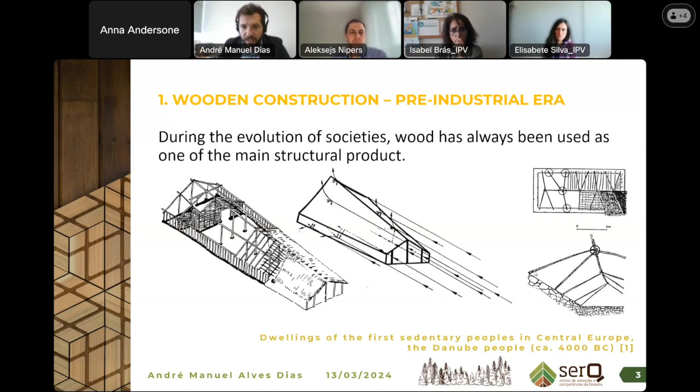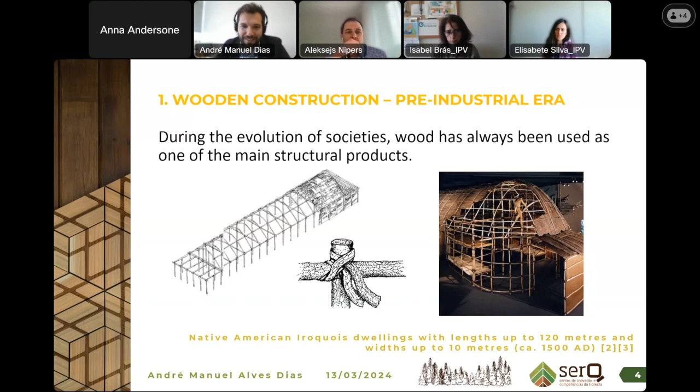The first one was found to have been built in 4000 before Christ, and it was made by Danube people. The next one was built by Native American people. Here you can see a structure 120 meters long and 10 meters wide, which is not a simple engineered system. It was quite complex. And also in China, we have bridges and towers made of wood. Here we have a bridge 42 meters long and 5 meters high.

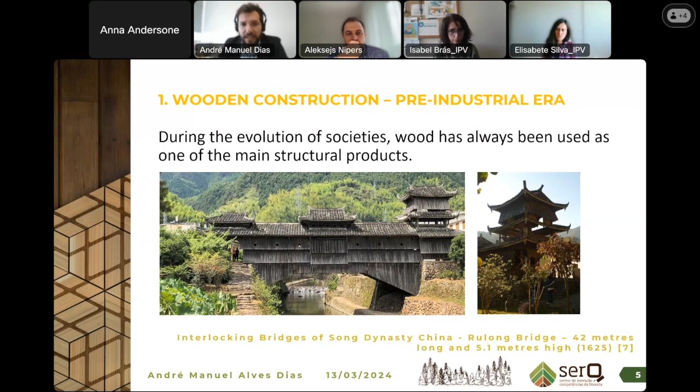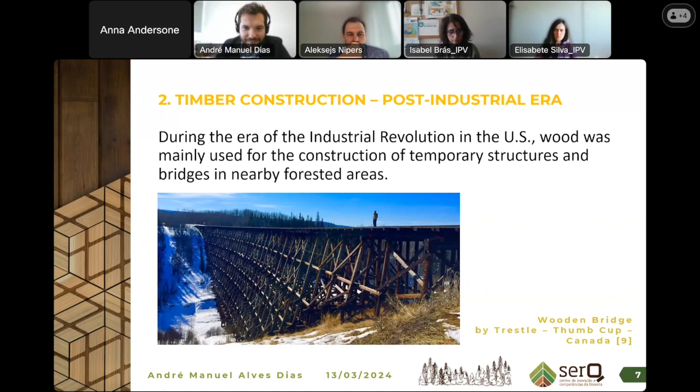All of these examples were from the pre-industrial era, but in the industrial era, with the development and commercialization of other materials such as concrete, bricks, steel, aluminum, plastics, etc., wood usage started to decrease until the 20th century, when glulam was invented, and after that panels and mass timber systems. Since the development of concrete, brick, and steel, wood was mainly used to support those industries. For example, in America, wooden bridges were used to support the extraction of steel and concrete.

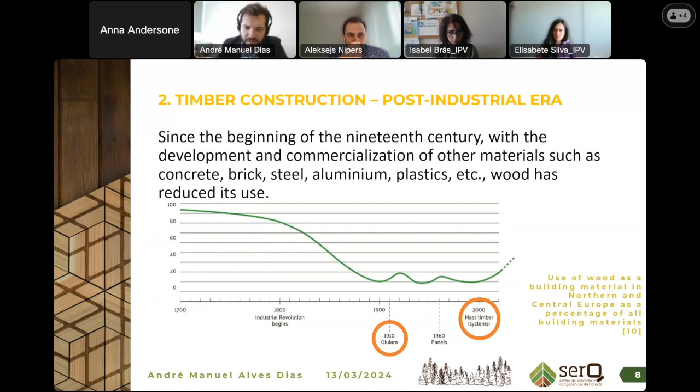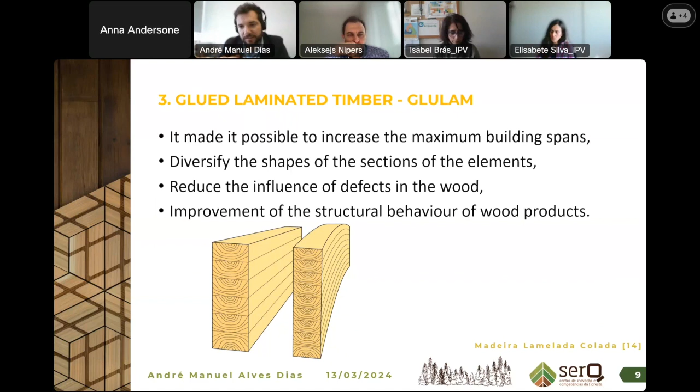But here I will show you some examples of glulam and CLT, mass timber systems, for you to know what these products are. Glulam consists of gluing sawn wood boards. When it was invented, it made it possible to increase the maximum building spans and the diversity of shapes of the beams, because we are no longer limited to the dimensions of the tree, and we can glue more boards to increase the span and the length. We also can reduce the defects in wood and improve the structural behavior of wood products.

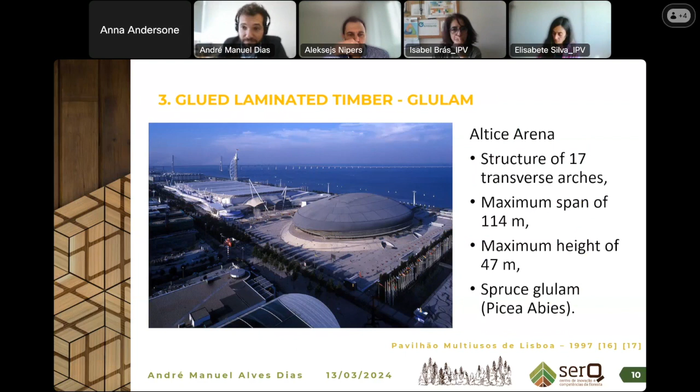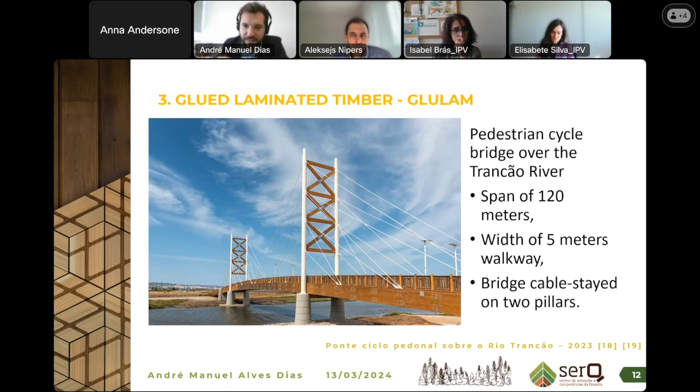The other material that I'd like to present is cross-laminated timber, which consists of gluing sawn wood boards in a transverse way. We have boards in one direction, and in the other layer the boards are glued in the other direction. So it made it possible to obtain panels with greater dimensional stability, and we have a structural material with the behavior of a shell, so it is possible to use it as walls, floors, and roofs. We can also increase the level of prefabrication and the thermal comfort and energy efficiency of buildings.

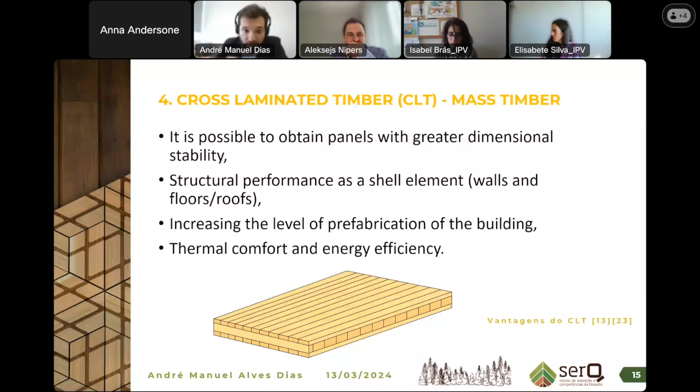So here you have one example of a building made of CLT. It was a system that combined CLT with glulam and with concrete, and this is the first high-rise timber construction. I think most of us may have heard of this building; it has 18 stories. So it was a good innovative building for timber construction, and it's a good example. Here you have an example of a CLT-based building.

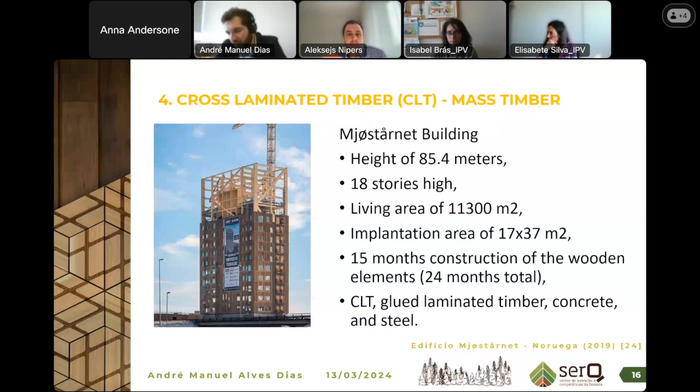Now, after the presentation, I will give you some advantages, disadvantages and challenges that from my experience I can identify in wood construction and the wood transforming industry. I will start with advantages.

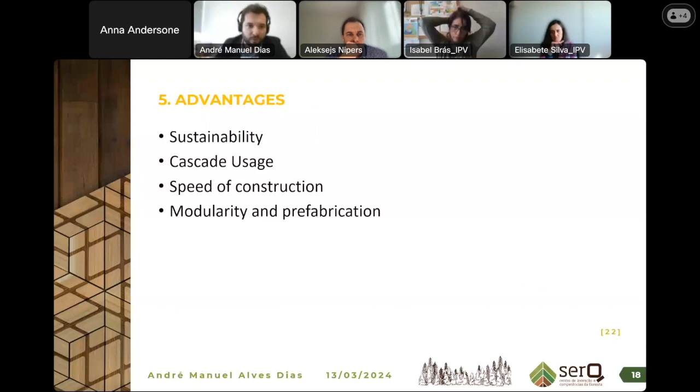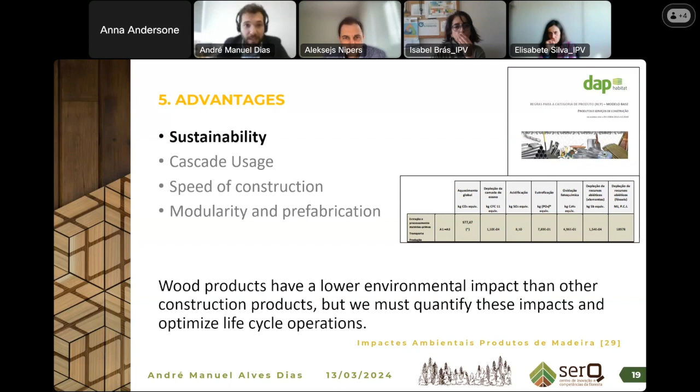The main advantage I identify is sustainability. During the growth of trees, the trees have the power to capture carbon dioxide and keep it in the wood. So when we use wood products, we are also using carbon dioxide that is sequestered inside the wood. This is a good advantage when we compare wood with concrete and with steel, because we have a low carbon footprint.

The next one is cascade usage. This means that at the end of life of wood products, we can have another use for these products. For example, at the end of life of a sawn wood board as a structural product, we can mill this wood and use it as a raw material for panel production, and so on. And at the end of life, we can at least use wood to produce energy. So this is a good advantage of wood, and we can increase the life cycle of wood products.

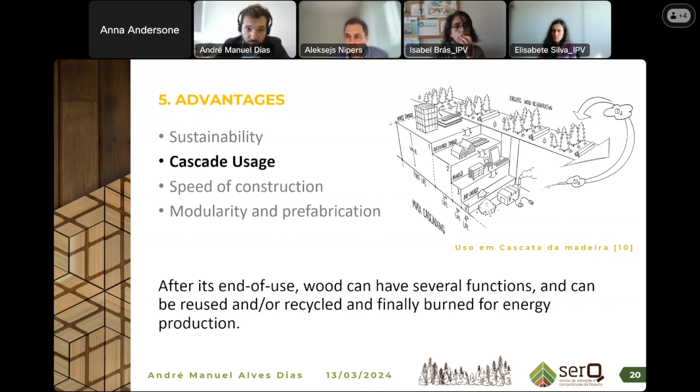And the last two I will talk about in just one slide: the speed of construction and the modularity with prefabrication. Nowadays we are facing problems with a lack of human resources for construction, and we need to increase the prefabrication of our buildings, and wood allows that prefabrication. And we can also reduce the time for construction.

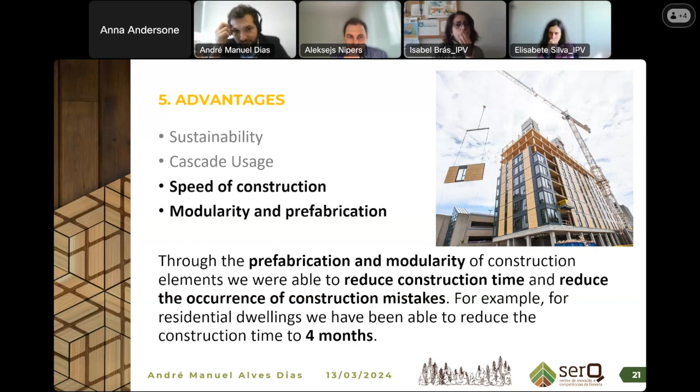For example, we work here in serQ with companies that, from the time they build on the land until they give the owner the keys of the house, take four months to build the whole house. So it's a very good time.

Now I will talk to you about some disadvantages. I don't like to call them disadvantages; they're more challenges that we are trying to face and improve. The first one is the lack of material, and the sustainability of wood and of forests needs to have one basis, one column, to support all the sustainability: when you cut a tree to use in construction, we need to plant another tree to ensure that we continue having raw materials for our system.

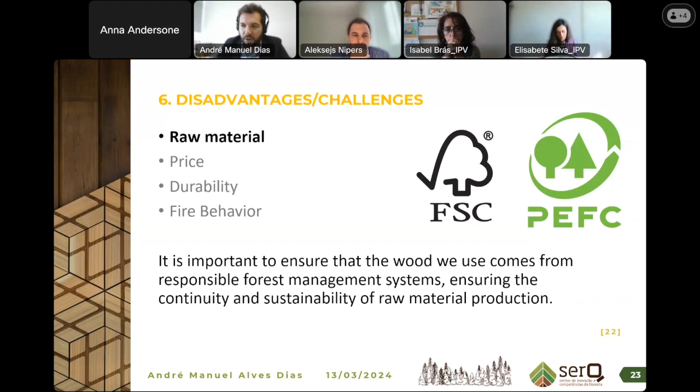So it is important for us to ensure that we are using raw materials from FSC and PEFC systems in our construction, to ensure that the timber comes from sustainable forests and from sustainable systems that plant another tree for each tree that we are using.

But here in serQ we are doing research about that. We are trying to reduce the price by improving the cascading use of wood, which means that if we can optimize the use of wood, in the first usage we can use it as a good structural product, and at the end of the first usage, we can use it as a constructive product for thermal or acoustic insulation.

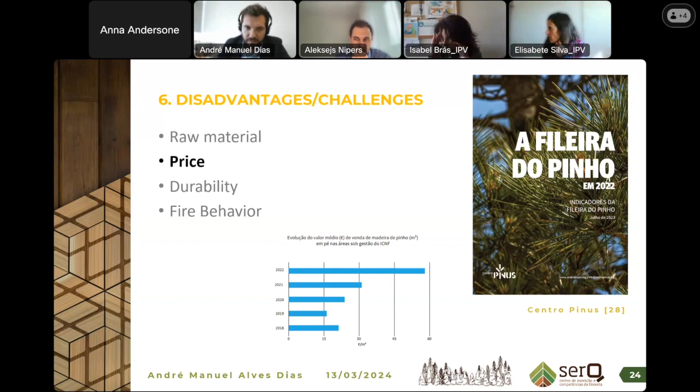In this case, the owner asked for a timber bridge. They didn't specify the wood species, but the wood species was Picea abies. As you may know, Picea abies is a very good wood species, but for use in the interior of houses, not outdoors. In this case, the Picea abies started having fungus attack, and they didn't see it in time, and this was the final result. So it is very important to have technical knowledge when we do the specification of timber buildings to prevent this type of scenario.

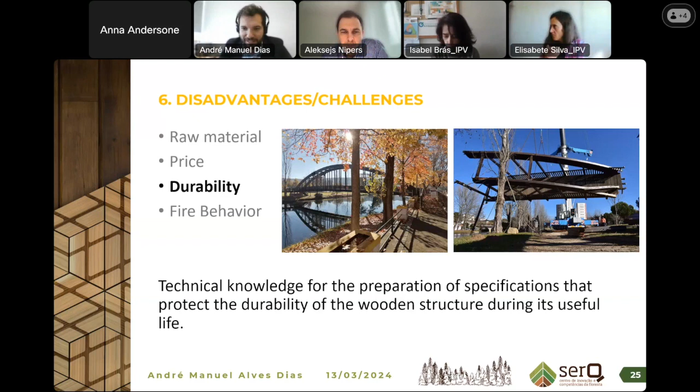And the last one: I think all of us know that timber burns. It's not new, but what's new is that we can prevent timber from burning. We can use sealing materials that prevent wood from burning, and also during the structural design stages, we can take into account the behavior of wood in fire, and we can ensure the security of people that use our structures.